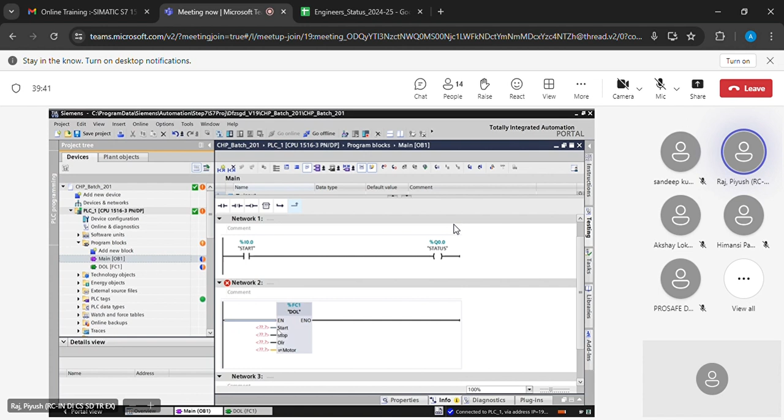So you need to update the block. Here you will get the option Update block call. Click on this. It will give you the compared list: this is your old and this one is your new. Click on OK. Now you can see it is asking you for the parameter for start, parameter for stop, parameter for OLR, and parameter for motor.

So here you can assign, like before, I0.0, I0.2, I0.3, and then Q0.1, suppose. So this will be the instance for motor number 1. Now, in a similar manner, you have to call the FC again, and this will be the instance of motor number 2. Here you can write the addresses I0.4, I0.5, I0.6, and Q0.2.

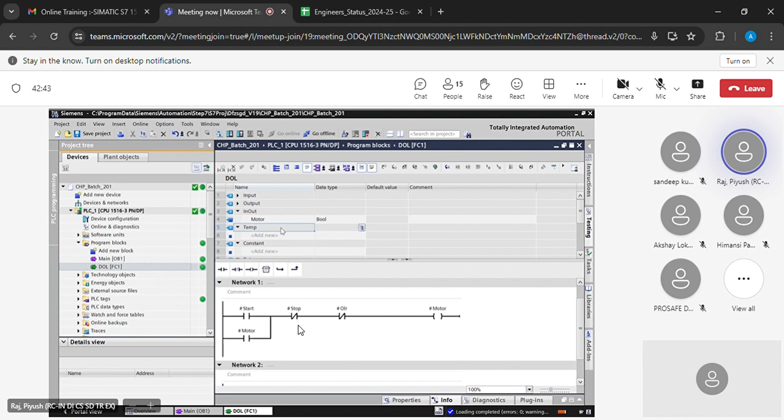Okay, so for example, instead of in-out, I am defining it in output. Let's define motor in the output. So this is my motor. Okay, and here I am using one temp variable, suppose temp. So this I have defined.

This temp will help in the holding, and finally this temp is going to give the command to my motor. Okay, so I have written this logic. First of all, tell me, will this logic work?

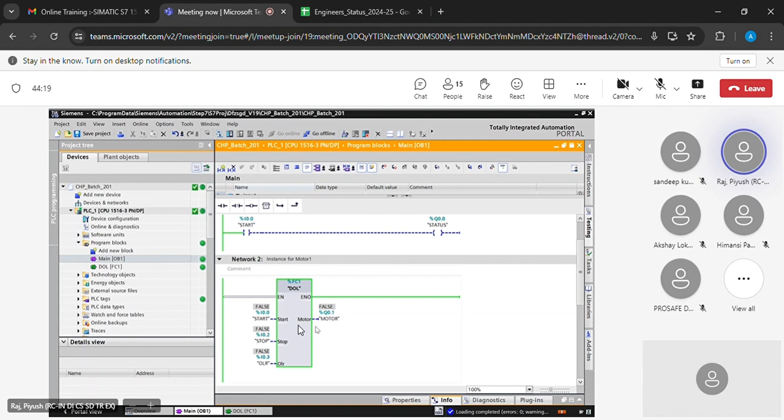Okay, you may get this error sometimes: the specified call environment is invalid due to a program change in the block made at a later time. Reset the call environment. That means this particular FC didn't get a particular call environment. So that's nothing. You go to your main OB1, just give the monitoring path. Double click on any instance. Now, if you start monitoring, it will provide you the path of that particular call environment.

So now tell me, is this logic correct? Yes, sir. Okay, let's see. So I have to give the start command. So I have given the start command. Correct. Now, here you can see, I have given the start command. My temp is on. My motor is also on.

Till here it's fine. But now, as I remove the start command, this motor should hold, right? Yes. So now you can see, I am giving the command from here. Yes, now you can see. So I have given the start command. Here you can see temp is on, temp is going to turn on the motor. But as I remove the start command, now it's become off. It is not holding. Why?

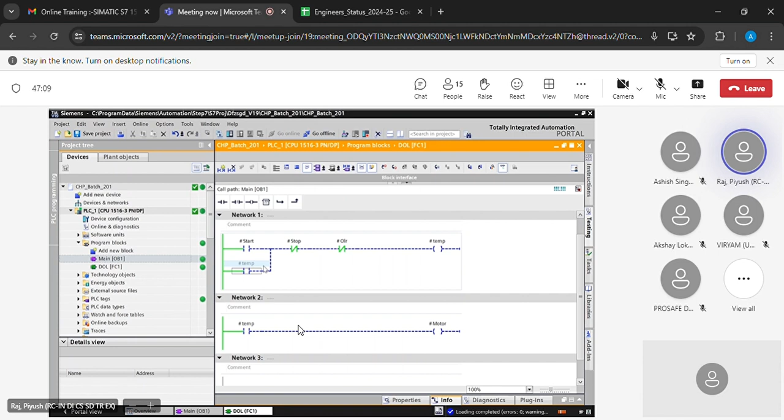So when the program's execution starts from here, at this instance, the temp variable is 0. Here the temp variable is 0, and now here the temp variable becomes 1. So that is left to right. This part is already executed. So left to right, here it becomes 1. So after that, here it will become 1. So it will turn on the motor. So as the instance completes, for the next cycle, again it becomes 0.

So please keep in mind, if you are defining a temporary variable, you need to take care of the sequence also. For example, I will cut this and paste it. Now what will happen? I have the temp variable in network 1, and I am writing the temp variable in network number 2. So will the motor get on? If I give the start command, will the motor get on?

There you can see. No, sir. As I give the start command, here you can see start. Now this temporary variable is on, but after this execution has completed, when it comes to network number 1, the value will become 0 again. That's why here the temporary variable is not able to turn on the motor. Correct? Understood temporary variable?

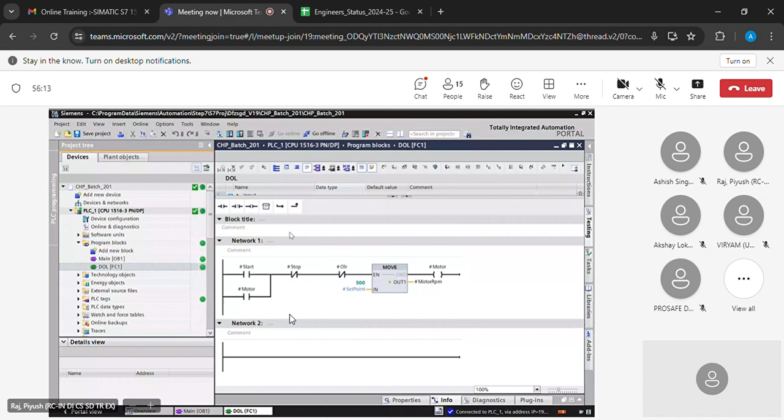Now, according to my logic, the start button is already pressed. So as I have turned on the start button, this move instruction got the command, and whatever set point I have defined in the input is now transferring to the output, and you are getting the same in your execution also. Correct? Now tell me, what will happen if I give the stop command? What will be the value of this motor RPM? Will it be 500 or will it become 0?

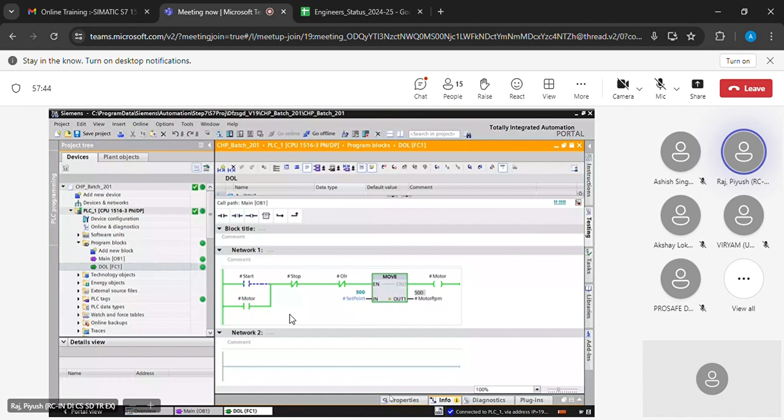It will remain 500. Yes, sir. Okay, so let's see. I have the start command now. As I remove the start command and trigger the stop, I need to cut the execution of my move block. Here it is still executing. So let me press the stop button. As I press the stop button, here you can see. Now this move instruction is not getting any execution, not getting any enable, and that's why the value became 0 again.

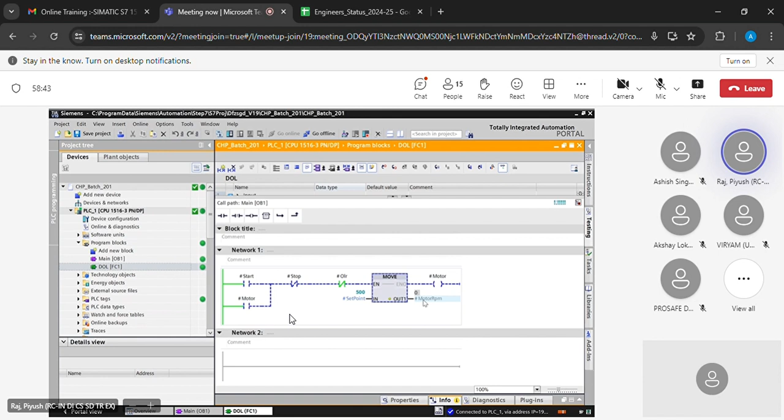So this is the meaning of this statement. Functions are code blocks or subroutines without dedicated memory. That means in a function also, if you store a value, it will only remain active for the current cycle; in the next cycle it does not remember what the value of the previous cycle was.

So what happened here: in the current cycle, when you were giving the start command, it was transferring this 500 to this particular RPM. As you removed the command, the execution started again. So whatever the value in the previous cycle, the FC is not going to remember that particular value. The values in an FC only remain in the current cycle.

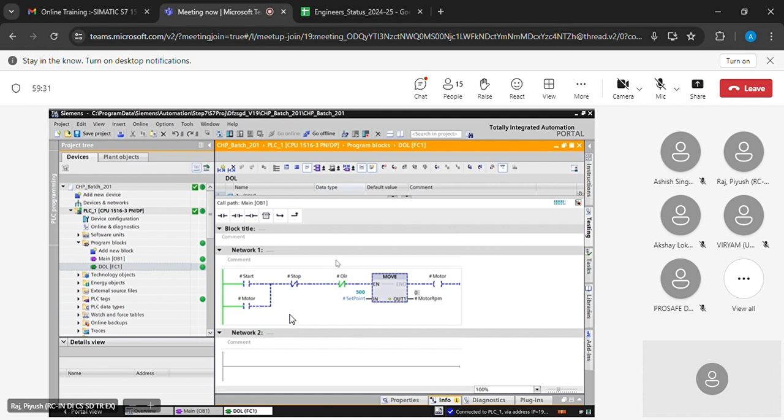Understood? Yes, sir. Okay.

So we have input here, output here, in-out here. Anything you define inside input, output, in-out, you need to compulsorily define the parameter over here. And for temporary variables and constants, you can use them inside the FC. And what about the return? Has anybody used this return variable?

You might have seen this type of instruction, like a normal instruction. For example, suppose I have taken a GET instruction. Now here you can see this return value. What is the purpose of this return value? You might have seen this particular variable in many instructions. What is the purpose of this return value?